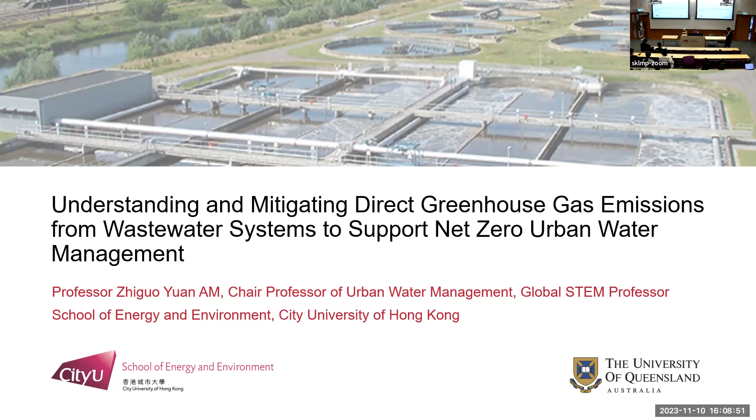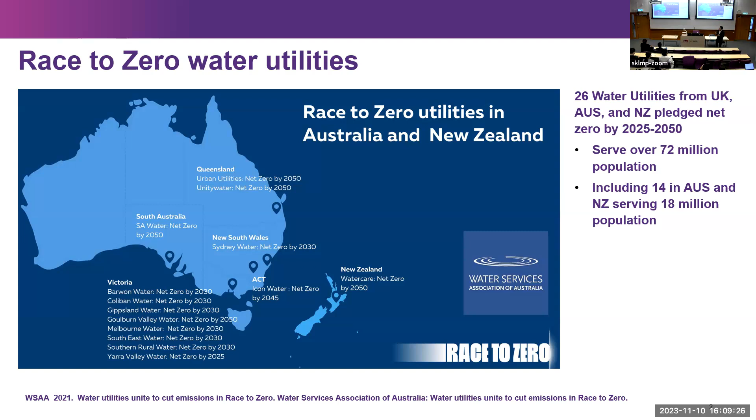At COP26, 26 water utilities from the United Kingdom, Australia, and New Zealand, serving 72 million people, pledged to achieve carbon neutrality by 2025 to 2050, just a short period of time away. I believe more water utilities will follow this strong drive toward carbon neutrality for urban water management.

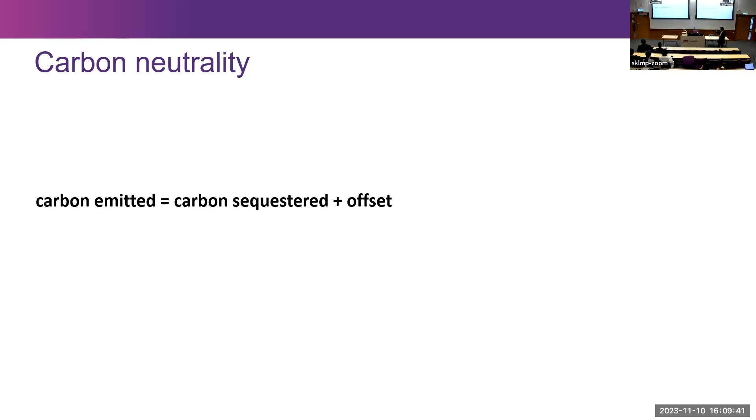So what does that mean? A simple definition of carbon neutrality, or carbon net zero, is that the carbon emitted from your system is equal to the carbon sequestered plus offset. That's the equation. I'll explain each of the terms.

In terms of carbon emission, there are three scopes, three types of emissions. One is direct emission, which I will explain next. Another is indirect emission. Scope 2 is indirect emission due to the consumption of power, since power stations are often supported by fossil fuels, and by consuming power you emit carbon.

Scope 3 is emission due to processes both upstream and downstream of urban water systems. These are the three scopes of emission. But when we talk about carbon neutrality, it includes both scope 1 and scope 2. Scope 3 is not part of carbon neutrality, although some urban utilities aspire to include it as well, which can be pretty massive emissions. So that's the carbon emitted.

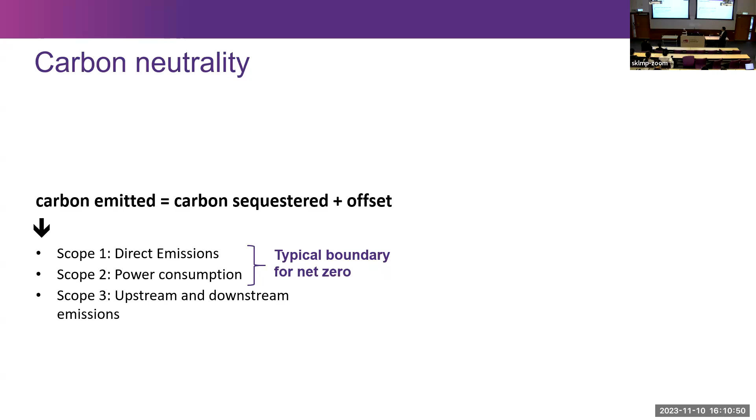In terms of carbon sequestration, biological processes could sequester some CO2 from the atmosphere or other sources. For example, nitrifying bacteria convert CO2 into biomass through CO2 assimilation. That is sequestration, but it's a tiny, negligible amount. However, if you deploy algae-based technology, you could potentially sequester quite a bit of CO2, and that's important.

The third one is some biogas upgrading processes, which is a process we developed. I will share those ideas with you towards the end of my presentation.

Now, offset. This is very flexible. In wastewater treatment, if we recover energy from wastewater and use part of it for urban water management, we reduce scope 2 emission. But if you have excess power that isn't used within your system and is exported to serve other communities, that is an offset. Or if you purchase carbon credits, or plant trees, those will also reduce your overall carbon balance and help you achieve carbon neutrality.

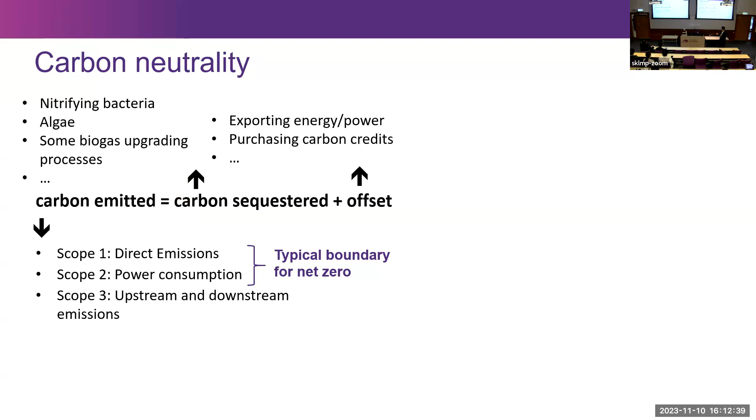Strategies to achieve carbon neutrality include, number one, reducing direct emissions, reducing scope 1 — these are gases you emit from your system. Reducing them helps you achieve net zero.

For scope 2, there are a few things we can do. One is to reduce energy consumption — if you reduce electricity consumption, you reduce indirect CO2 emission. Or you generate renewable energy from wastewater and reuse it, reducing the amount of energy you need to import. Third, you can purchase renewable energy like solar or wind power for wastewater management, which also reduces scope 2 since those sources emit less CO2.

The third strategy is offset. If you produce energy and export it to other communities or clients, you generate credit for yourself. Sequestering CO2 also helps you offset, as does purchasing carbon credits or planting trees. All of these belong to offset — these are the ways to help achieve carbon neutrality.

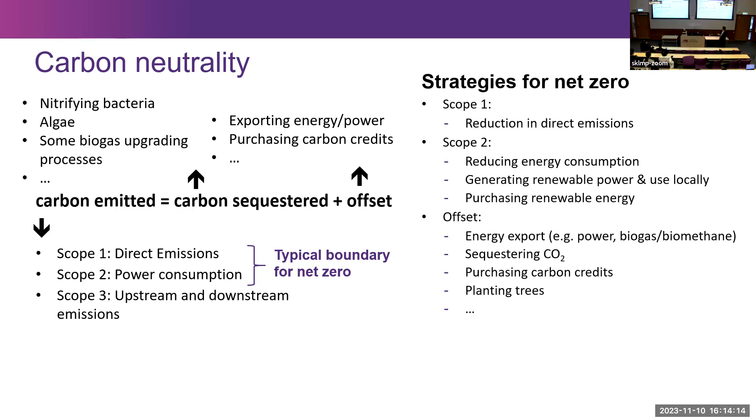With that background, my presentation today is divided into two parts. First, we focus on direct emission — what are they, and how much are we emitting from urban water systems? I'll focus on quantification. Our team has also worked on the fundamentals, understanding, and modeling, and I'll touch on those aspects, though I won't give full details on the modeling.

Then I'll get to part two, which is on mitigation. So part one helps us understand how much we are emitting, but that's not enough — it doesn't really help you to reduce emissions.

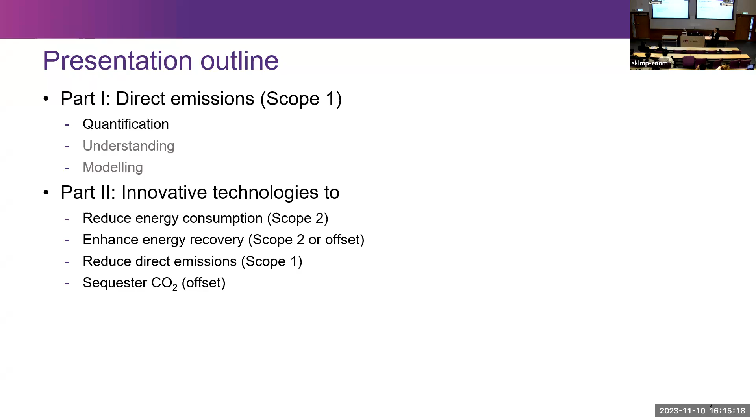So part 2, we focus on innovative technologies to reduce energy consumption, to enhance energy recovery, to reduce direct emissions, and also to help sequester CO2. If we can achieve those goals, we really physically reduce the carbon footprint of an urban water system. So that's the outline of my presentation.

So part 1, direct emissions. What greenhouse gases do we emit from urban water systems? We really talk about 3 gases: nitrous oxide, N2O, methane, and carbon dioxide. The first two, I'm sure you all know already. They are strong greenhouse gases.

Carbon dioxide, I need to make one clarification. In general, wastewater treatment processes emit a lot of CO2 because of the oxidation of organics into CO2. But the majority of that is not regarded as greenhouse gas emissions, because that CO2 is coming from biomass, which is short cycle, the carbon short cycle. CO2 assimilated by plants, we consume the plants, we emit CO2 back to the atmosphere, and plants will take it again. So that's really a short time cycle, and that is not considered as your contribution to greenhouse gas emissions. However, wastewater also has some carbon that is from fossil fuels, for example, detergents you're using, or so many things you're using in your household or in industry. And if that carbon comes to the wastewater treatment plant, you oxidize that to CO2, and that is a direct emission. So I just want to make that clarification.

Now, if you look at carbon CO2 production, that's easy to understand. We oxidize the organic carbon, we produce CO2. And if you look at methane, that's an anaerobic process. Most people here should understand that anaerobic biological conversions convert organic carbon to methane. That is the principle for methane formation.

N2O production, I need to explain a little bit. For those who work on biological reactions in environment or in a wastewater treatment process, you understand that the biological nitrogen cycle is very important. These are the important steps: ammonia oxidizes to nitrite by ammonium oxidizing bacteria via hydroxylamine, and then nitrite can be oxidized to nitrate by nitrite oxidizing bacteria. That's another step. Then denitrification goes from nitrate to nitrite to NO, N2O, and nitrogen gas. So that's nitrification and denitrification, which are fundamental for biological wastewater treatment, because we need to remove nitrogen from wastewater using nitrification and denitrification.

If you look at this, you can see N2O is sitting in the middle of the denitrification pathway, so it is a compulsory intermediate in denitrification. Therefore a lot of N2O is produced by heterotrophic denitrification. Fortunately, that reaction happens in an anoxic tank, where there's no active aeration, meaning no gas is leaving. Therefore, although N2O is produced, it is almost immediately converted to N2, not much emission. So that's a lucky aspect.

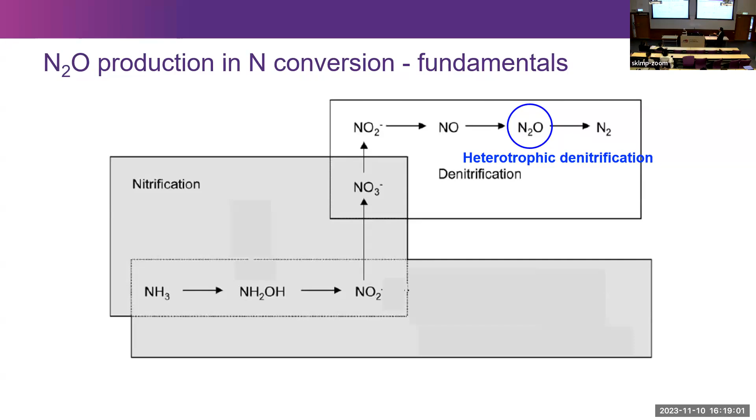But if you look at nitrification, ammonium oxidation, this is done by AOB, ammonium oxidizing bacteria. They produce N2O as well. They do nitrite reduction, not for a known purpose, maybe for detoxification or for whatever reasons. They do nitrite reduction to NO and from NO to N2O. Unfortunately, they don't have the enzyme to continue the denitrification from N2O to nitrogen gas. Therefore that is stopped there. That N2O is produced aerobically, because this reaction happens in the presence of oxygen, and oxygen is provided through aeration. So you have a gas going through to provide oxygen, and that same gas will take nitrogen and N2O out. So whatever is produced there, the majority of that is emitted.

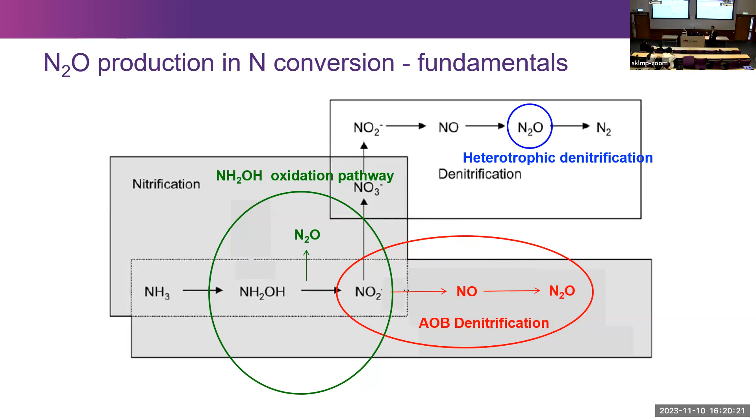So that's one process. Another one, the green pathway, is also produced by AOB, ammonium oxidizing bacteria, and that pathway is called the hydroxylamine oxidation pathway. The red is AOB denitrification, the blue is heterotrophic denitrification, and the green is hydroxylamine oxidation pathway. That is also produced aerobically, therefore it can also be stripped. I just wanted to give you some fundamentals so you understand better what I will be talking about.

Now I have covered what gases are emitted from an urban water system, and also explained how N2O is produced in an urban water system or wastewater system. Next question is: where are these gases emitted? What I'm showing here is a complete urban water system. We start from reservoirs where we store water, the catchment stores the water for water production, and the catchment produces N2O and methane.

After water consumption, the wastewater goes through sewer networks where potentially we have methane and N2O. Then when that wastewater comes to the wastewater treatment plant, where biological reactions happen, N2O, methane, and fossil CO2 will be produced.

And when the effluent, which still has some organics, goes to the receiving water environment, the river or estuaries, N2O and methane can be emitted as well. And going to the bay, even in the bay and marine environment, we also have N2O and methane. So basically they are produced everywhere.

My research team has actually worked on all these elements, but today I can't cover everything. I will mainly focus on this environment, wastewater treatment, sewer networks. The rest I will touch upon briefly.

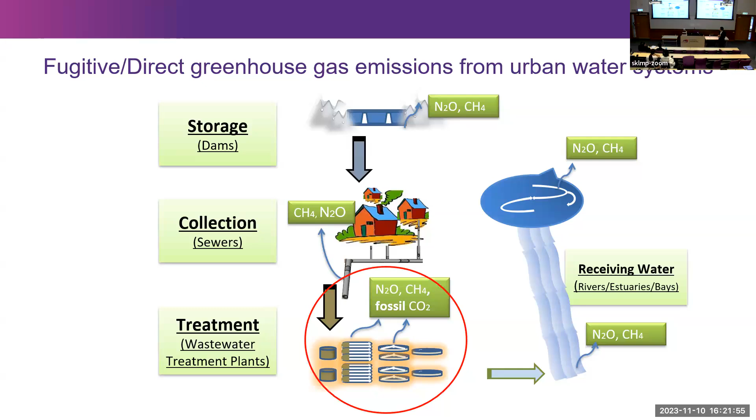Wastewater treatment plant first. I guess the audience here in the room or online may not have a complete picture of how wastewater is treated in a wastewater treatment plant. So I'd like to walk you through the processes involved in wastewater treatment.

Here we have wastewater delivered to the treatment plant where we could potentially, not always, have a primary settling tank where the suspended solids in wastewater is separated and then diverted. I will come back to that point. And then the settled effluent, primary effluent, is fed to a biological reactor or multiple biological reactors where biological reactions happen.

The biological reactions remove organic carbon and remove nitrogen. So here in this tank, that's where biological reactions happen. And then the biological reactions lead to the growth of bacteria.

Here we have sludge, and here we have a secondary clarifier where the biomass is settled and the treated effluent is discharged after disinfection. And then here, the majority of the biomass is returned to the reactor to retain the bacteria in the system to do the work for us, but some excess sludge will join the primary sludge.

And send it to a thickener where we thicken the sludge, and then the thickened sludge is fed to an anaerobic digester. That's the energy recovery process. Anaerobically, we convert organic carbon in the sludge to biogas.

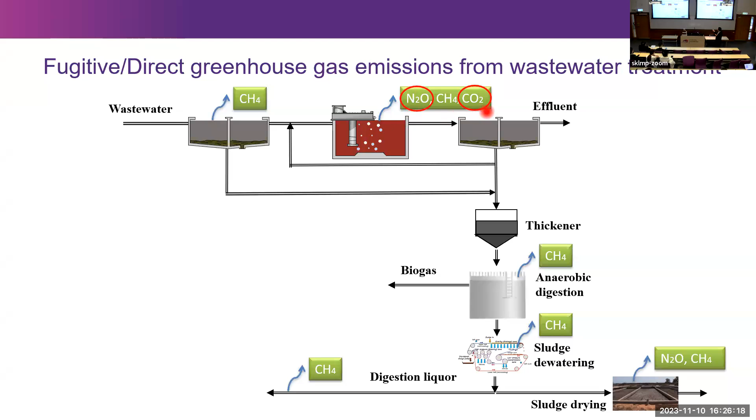And then methane here from the anaerobic digester, that's more a management issue, and I did not work on that. I think that can be improved through proper management. My team also worked on technologies to remove that methane from anaerobic digestion liquor, but I won't be able to cover that. And this, we also worked on this drying lagoon, but I won't have time to cover that either. So I will focus on N2O and CO2 emission from a wastewater treatment process. So that's the treatment process.

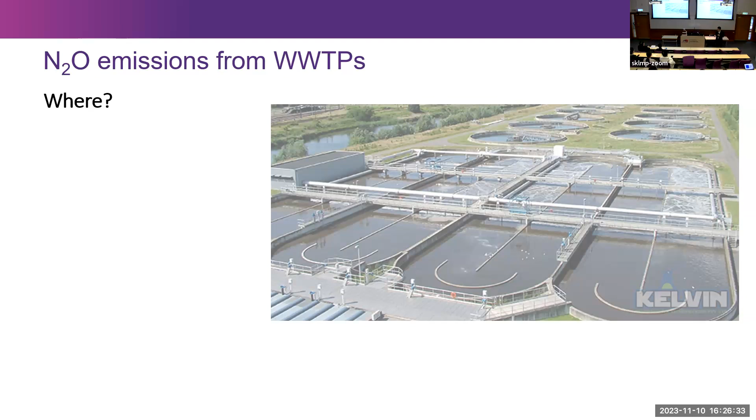Okay, this is a wastewater treatment process, and the first question we want to answer is: N2O is emitted, but where in that treatment process, and in the biological reactor, where is that emitted?

In the biological reactor, we have anoxic zones where we provide no aeration, so no gas is going through the reactor, and aerobic zones where we provide air to give oxygen to the process. So aerobic, anoxic - what I'm trying to show is it's mainly from aerobic zones, less from anoxic zones.

I'd like to bring attention to this slide I showed you before. Although we produce a lot of N2O through denitrification, there's no active stripping, so therefore very little N2O from denitrification is stripped. But for these two N2O sources, green and red, they happen in the aerobic zone where you have aeration gases going through and actively stripping that off. So therefore we have more N2O from the aerobic zones than from anoxic zones. That's the first question answered.

And then, by whom? Who is doing this? I think with my explanation it's clear to you - the main contributor in terms of N2O production is heterotrophic bacteria, they produce most of the N2O, but it's not stripped. In terms of the N2O that is stripped, it's mainly produced by the ammonium oxidizing bacteria through those two pathways, the red and the green pathways. So that question was also answered.

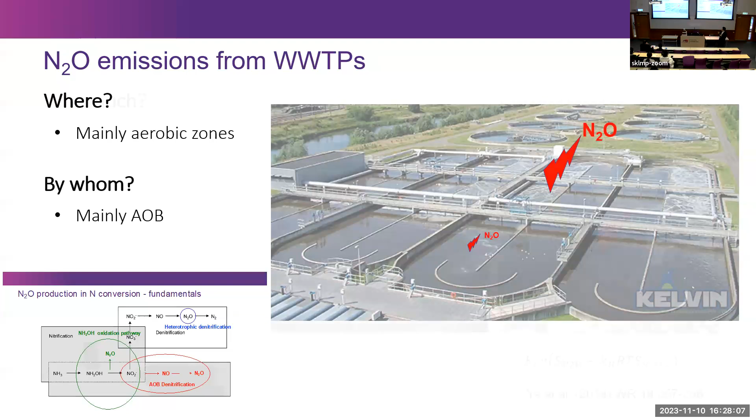I probably won't show you the evidence, but just believe me. And then the next question: how much? How much are we emitting? There are two different methods to quantify this.

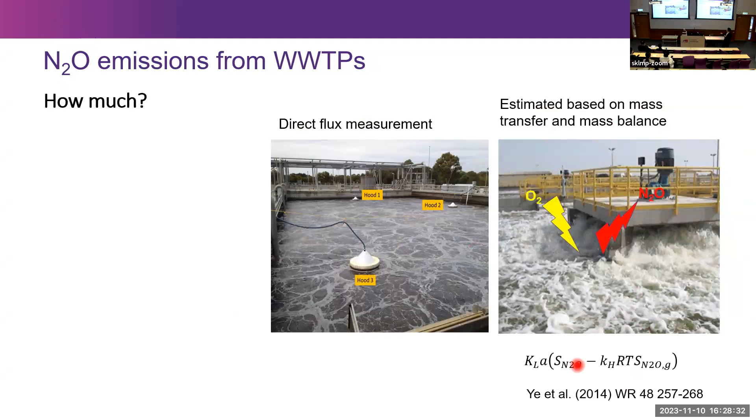One method is to cover part of this aeration tank, the biological reactor. We put some hoods there, we collect the gas, and then we use an online analyzer to analyze it. And then we could also use some mathematics to estimate it. So we don't need to go into details.

Now, some 15 years ago, my team started measuring quite a few wastewater treatment plants in Australia. I'd like to show you the results. But before I show you the results, I'd like to make one definition: the emission factor.

There are many different definitions of emission factors in literature. The one I'm using is: emission factor is the percentage of nitrogen in the wastewater influent converted to N2O. If you have 100 kilograms of nitrogen coming to your treatment plant, and you have 1 kilogram of N2O formed, then the emission factor is 1%, right? So that should be simple.

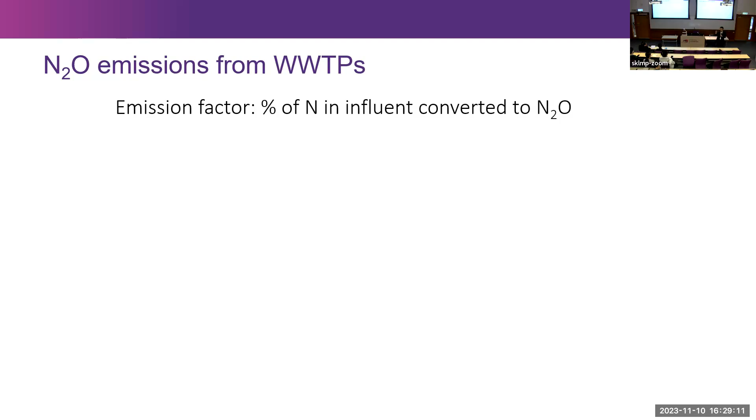But then how high is high? There's a rule of thumb here: an emission factor of 0.5% or above - if 0.5% of your nitrogen in wastewater is emitted as N2O, the greenhouse gas effect of that emission is equivalent to, roughly speaking, 20% of your overall carbon footprint, or adds 20% to your carbon footprint. So that's very significant - 0.5% adds substantially to your emissions.

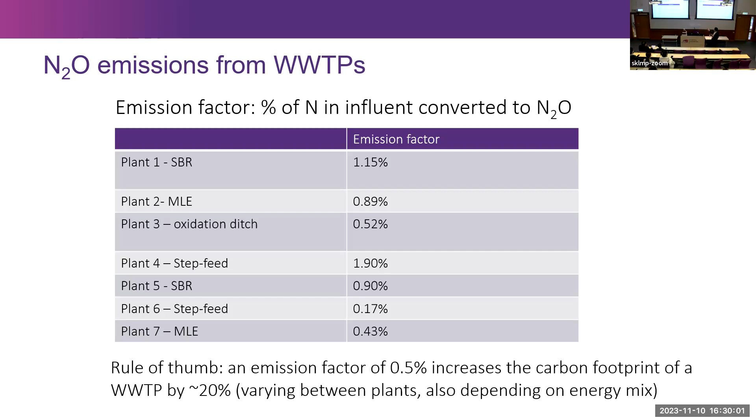Now, ready to show you some of the results. In that round of measurement campaign - that was the second round of our measurement campaign; literally right now the team at UQ is doing the third round - you can see the 7 plants there, and these are the emission factors we determined. The lowest we found was 0.17, which is really good, very low, but the highest we found was 1.9 - so a wide range. The median level is about 1%.

Remember, I said 0.5% would add 20% to your carbon footprint - 1% will add 40%. So that is not negligible, it's a fair bit. So that's our results.

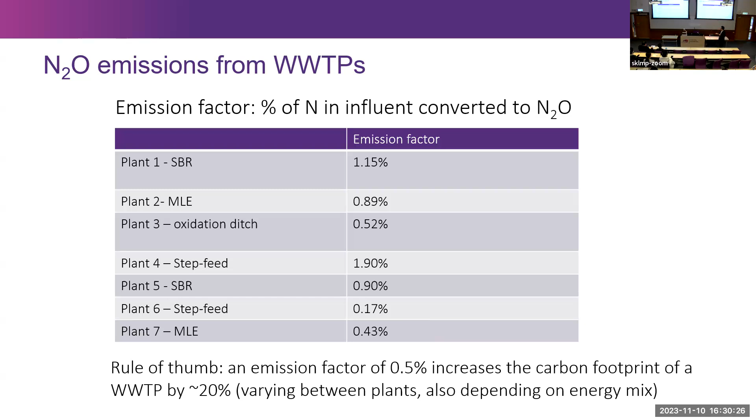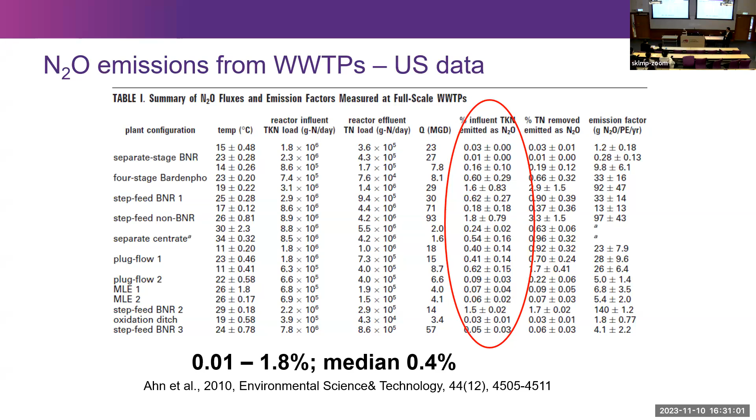I have reasons to believe that may be a little bit underestimated, because at that early stage of measurement the methodology was still being developed. So that 0.4% may be an underestimate.

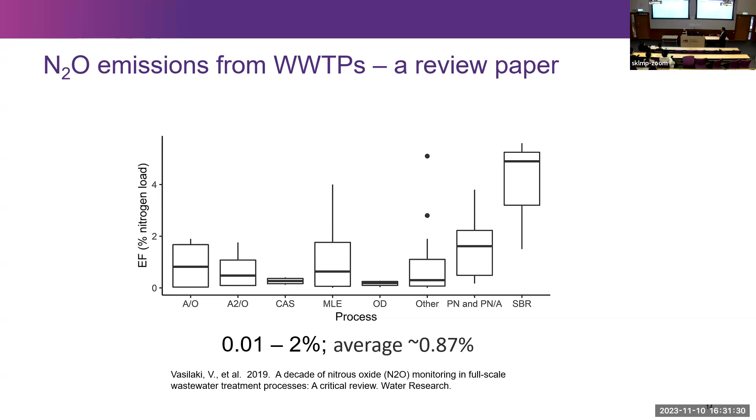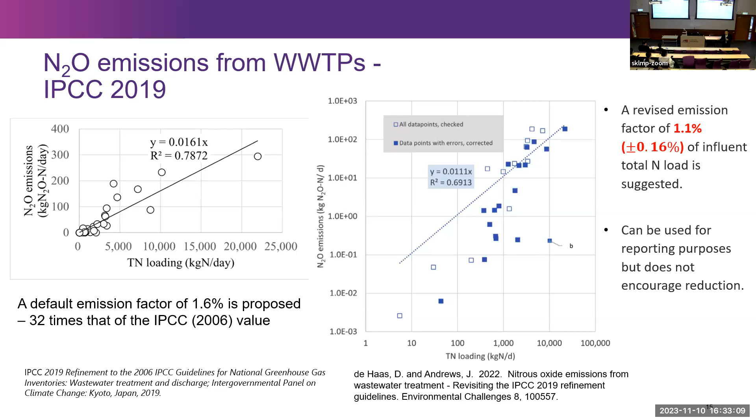Once we know the emission factor, that gives us an idea how much we are emitting, but it doesn't really help us reduce emissions. If we use 1% for accounting while making no effort to reduce it, that doesn't help reduce carbon emissions. Therefore I believe that's not adequate. We should really further improve that emission factor estimation based on performance.

Now that's the N2O. I'd like to give one slide on CO2 emissions from a treatment plant, not because the emission is significant, but because the method is quite interesting. Some of you may use this method in your own studies. What we did was make use of the fact that the plant biomass has different C13, C14 levels.

The C13, C14 levels in plant biomass are different from C13, C14 levels from fossil carbon. So if you have different C13, C14 signatures in the normal renewable carbon versus the fossil carbon, we can use that to separate them using some of the machines our key laboratory has, and determine how much fossil carbon we have at different stages of the treatment. For those interested in this technique, you can check our paper — a 2013 publication. The conclusion is 1 to 7% of the greenhouse gas emissions from a wastewater treatment plant can come from fossil CO2.

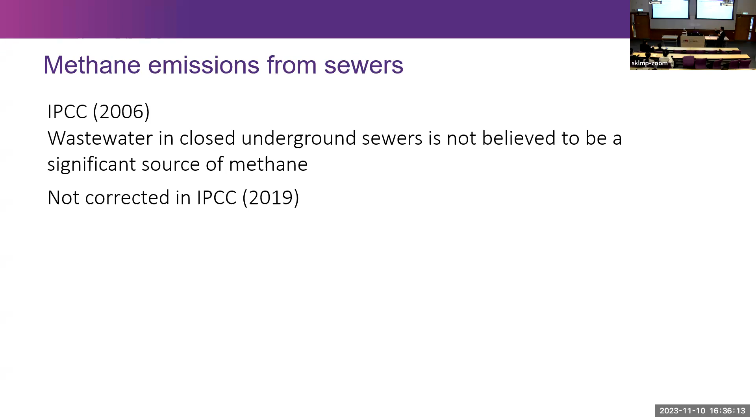That's the general conclusion. Now coming to methane, another source: methane emissions from sewer networks. In the IPCC 2006 guidelines, they said no emissions. Then in 2008, we published our paper — the first paper to show they were wrong, and that there are significant methane emissions from sewer networks, based on our research. Unfortunately, they did not really correct that issue even in the 2019 guidelines, but they did recognize it as something to be considered in the future.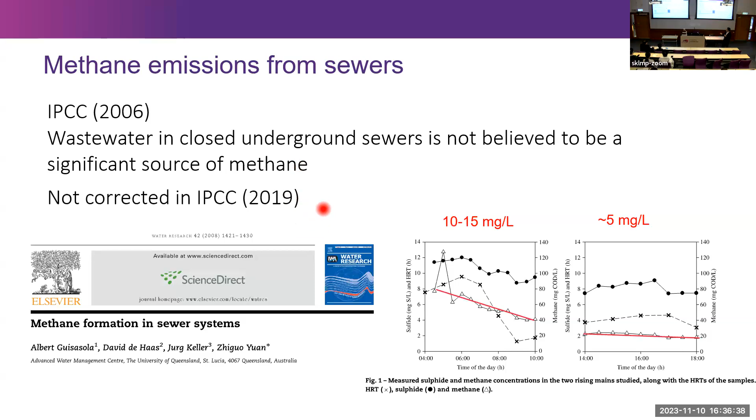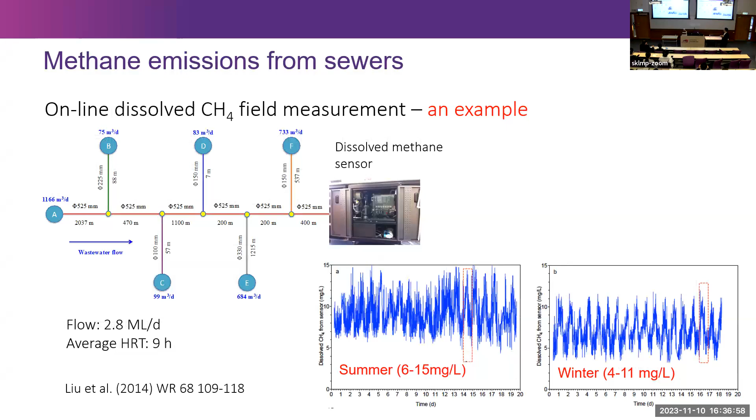So our team continued to work on methane emissions from sewer networks. I'll skip the details in the interest of time — the basic conclusion is there are significant emissions that most of the time cannot be neglected. How significant can it be? Based on the amount we measured, we estimated the typical CO2 equivalent per megaliter of wastewater compared with the normal emissions from a treatment plant, and came to the conclusion it's somewhere between 3 to 40%, meaning from negligible in some cases to very significant — 40% you can't ignore anymore.

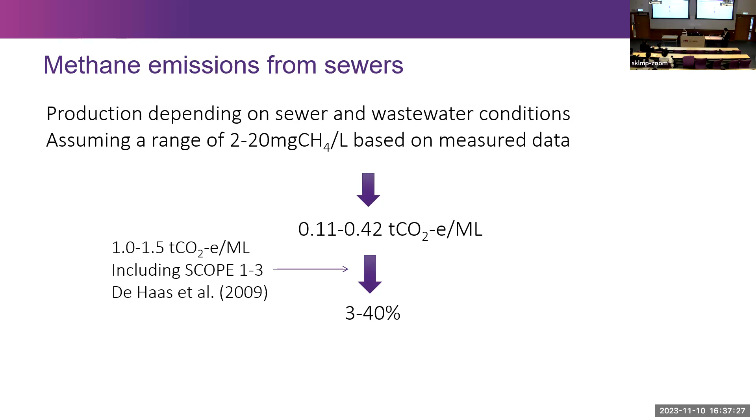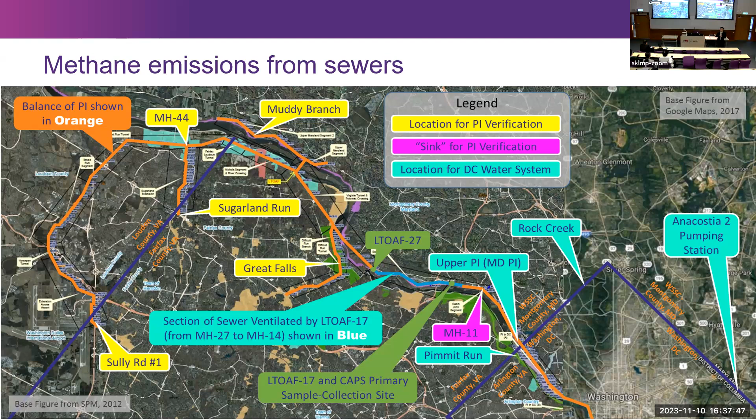But the issue — this figure shows a sewer network — is that methane emission from sewer networks is extremely hard to quantify, unlike a wastewater treatment plant which you can measure. A sewer network spreads across the city with a lot of openings, manholes, and pumping stations, so you can't really easily measure those. So we came up with a model-based estimation approach, but in the end I'll show you the key results — we have come up with accounting guidelines.

We are hoping that IPCC can adopt this eventually.

For gravity sewers that are driven by gravity, this is the equation we propose. Very simple: Q is the flow rate, D is the diameter of the pipe, S is the slope of the pipe. Once we know those and we know temperature, we can estimate methane emissions.

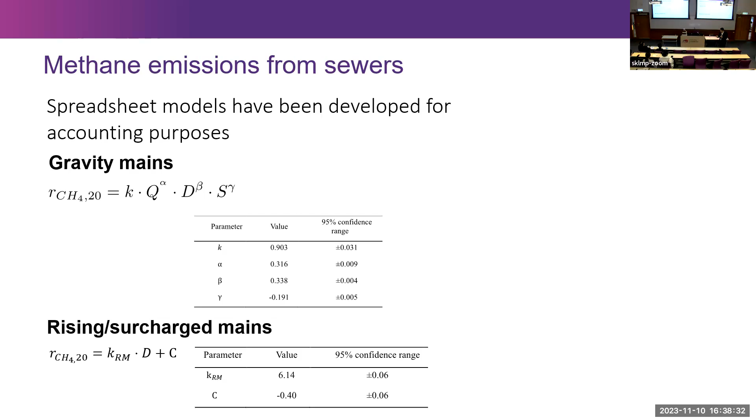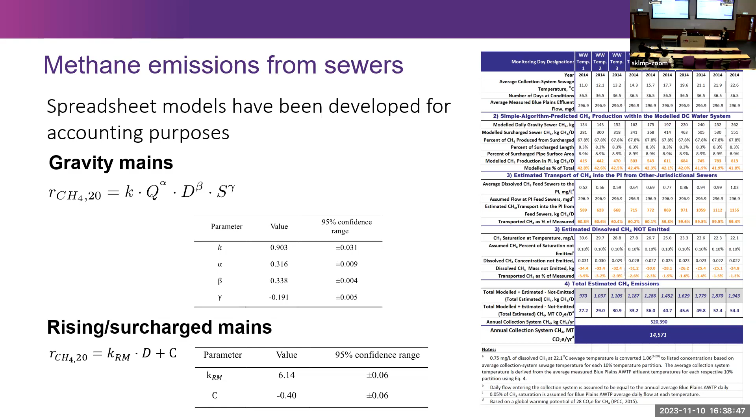For rising mains or pressurized mains, we get different equations. We're hoping this research work is going to influence the policy, influence how the IPCC is going to recommend in the future. This is an example showing how we use the equations to estimate methane emissions from a sewer network in Washington, DC, in collaboration with some colleagues in the US.

Now, two slides on the methane and N2O emissions from waterways—the bays, the rivers, estuaries. I thought this may be of interest to you. Unfortunately, I don't have strong conclusions. We did work on those areas for quite some time.

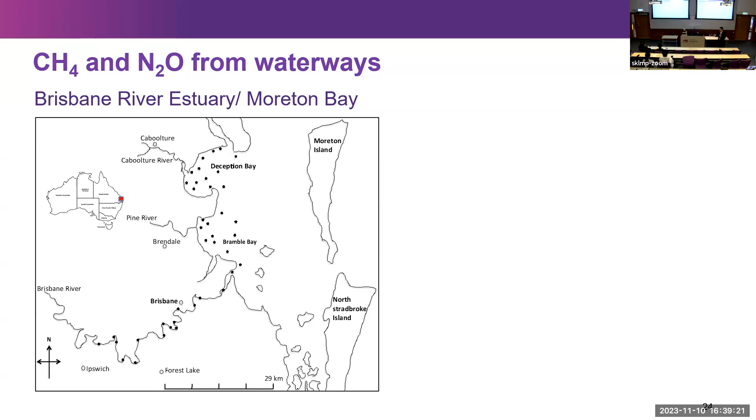That's a bay, Brisbane in Australia, a big bay there. We had our sampling locations along the river—this is the river, this is the bay. You can see a lot of work there. We also did reservoirs, water storage dams supplying drinking water in Australia. We produced a lot of results for each of those systems we measured.

Unfortunately the conclusions are not extremely strong because it's very difficult to draw general conclusions. Here are the conclusions: large variations between systems—each system is different, with different levels of emissions, and large spatial and temporal variability. It varies between locations in the same system, and between different times of the year and different times of the day. We observed all that variability.

Another relevant finding: methane dominates in reservoirs upstream, while N2O emissions are more dominant in the bays, estuaries, and rivers. In Australia at least, it's very hard to separate the contributions of urban wastewater to those emissions, because wastewater treatment is quite advanced there—we couldn't really separate the contributions of the urban water system to methane and N2O emissions from the receiving water environment.

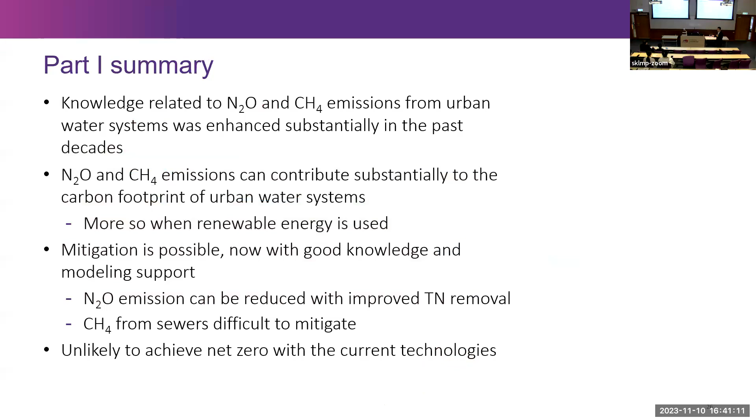So, part one summary—I think I used too much time already. Over the years we have generated a lot of understanding of methane and N2O emissions, and we show mitigation is possible. But I'd like to draw your attention to the last conclusion: it's unlikely to achieve net zero with current technologies. That's an important conclusion, and I'd like to explain what I mean by that.

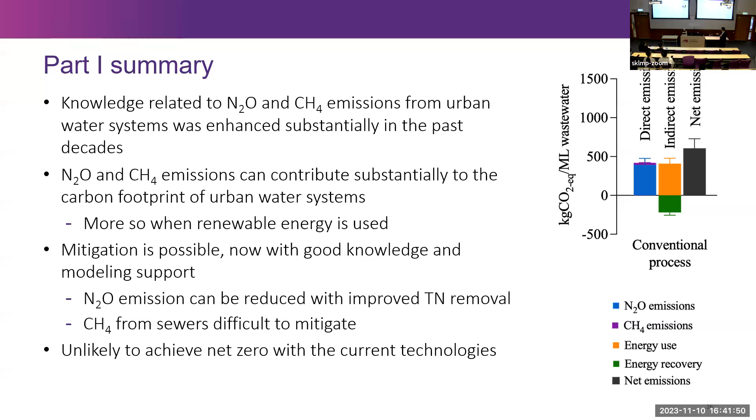So then we need innovative technologies to reduce the carbon footprint. We have multiple goals we want to achieve, but the key issue is, are these goals consistent? When you achieve one goal, are you actually deteriorating another performance? The good news is they're actually reasonably consistent—that's what I'd like to show you.

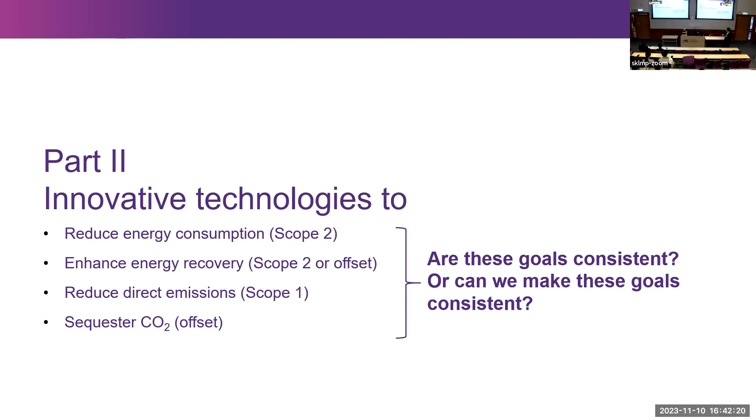I said we could potentially have conflicting goals—if you want to reduce energy consumption, you could potentially increase N2O, or vice versa. Fortunately, this is not the case. The goal of reducing energy consumption is consistent or compatible with the goal of reducing N2O emissions. With some luck, I think that's beautiful—really nice. In this particular case, we managed to reduce both direct emissions and energy consumption, which is really good.

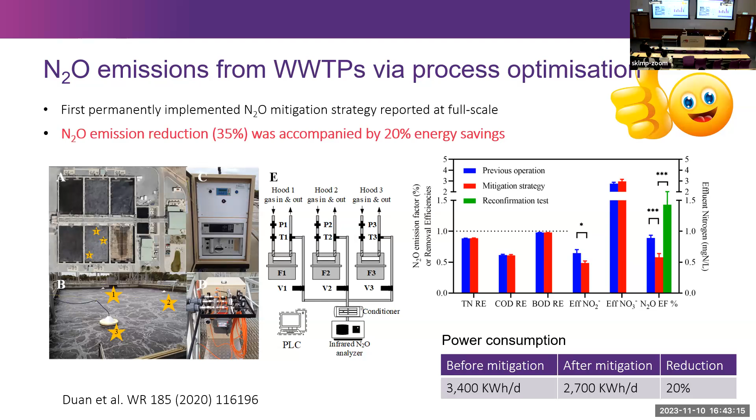Now, as I said, with the current technology it's going to be very difficult to achieve net zero. The reason is that anaerobic digestion for energy recovery is an add-on feature to the treatment process. Historically, we treated wastewater using this technology, and afterwards we gave it an afterthought—oh, we should also recover some energy, so we added this digester.

And the amount of energy we can recover here is relatively small. And therefore, in order to achieve net zero, we actually need to do something fundamental to the design of a wastewater treatment process.

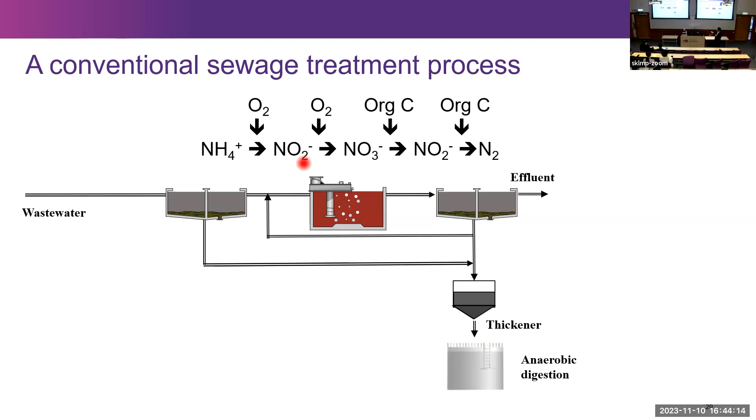I'd like to highlight the importance of organic carbon for nitrogen removal. So, nitrogen removal: ammonia to nitrite, nitrite to nitrate, and then denitrification, nitrate back to nitrite and to nitrogen gas. For denitrification, we need organic carbon. In order to have that carbon, we actually need to give most of the organic carbon through this process rather than to the anaerobic digester. So that's a fundamental difficulty in achieving a high level of energy recovery.

In fact, in most treatment plants in Australia, we don't have a primary settling tank anymore, in order to completely remove that separation. So all the carbon is fed to the biological reactor to support denitrification. With that, we actually increase the energy consumption here. So the goals do not really add up.

But now, commonly in the wastewater treatment area, the accepted configuration for the next generation is that we need to enhance upfront carbon separation, for example by using the HRAS process. We include HRAS, separate as much carbon as possible from the wastewater, and divert it to the anaerobic digester for bioenergy recovery. Then the carbon-deficient wastewater is fed to the biological treatment unit to remove nitrogen.

The problem is, when we don't have much carbon there anymore, we can't use conventional nitrification-denitrification, because denitrification requires carbon. So we do achieve the goal of energy recovery, much enhanced energy recovery, but we need to deal with nitrogen removal. So here we use the partial nitritation-anammox process.

For those who have heard of it: we oxidize 50% of the ammonia in the wastewater to nitrite, then use the nitrite formed to oxidize the remaining 50% of ammonia, producing nitrogen gas. So we remove nitrogen without carbon, and by doing so we allow the carbon to be diverted to the digester for bioenergy recovery. All beautiful, and by doing that we also reduce energy consumption here.

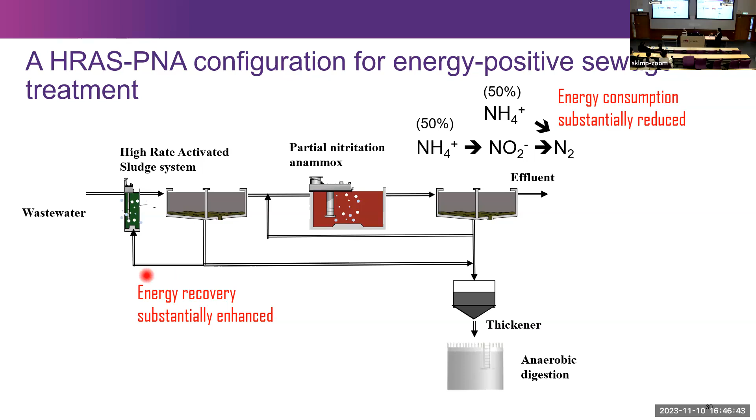So we reduce energy consumption by 50 to 60%. If you look at this, we recover more energy using carbon separation, and we consume less energy. So these two goals can be achieved simultaneously, which is beautiful.

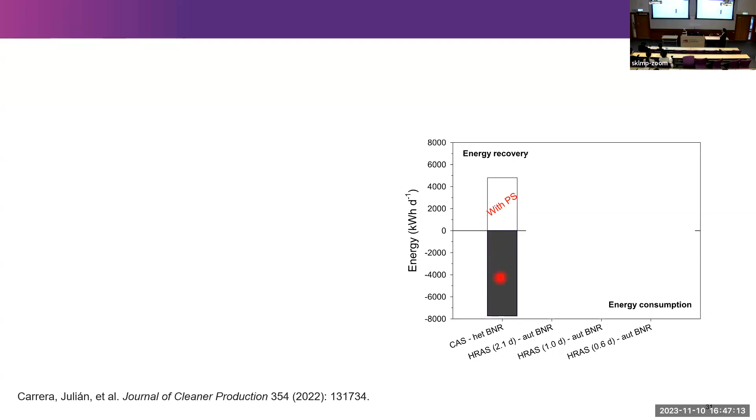I'll show you some results from the literature. This is the process, the system without separation. You can see we have a primary settling tank. This is the energy consumption, this is the energy recovery. This plant actually got very good energy recovery, but that's only 50% of the energy consumption. That's what's achieved with the primary settling tank.

But now, if we look at using HRAS for carbon separation, you can see we can remove 60 to 80% of the COD, the organic carbon in wastewater, for energy recovery. That's really good, and you can recover a fair bit of bioenergy from wastewater.

With that, without needing to worry about the details, you can see in terms of energy recovery we have more energy recovered in these three cases, and energy consumption is reduced a lot. If you compare the white bar with the black bar, the white bar is now taller than the black bar, meaning the system is now energy positive. You can produce more energy than you consume, which is beautiful.

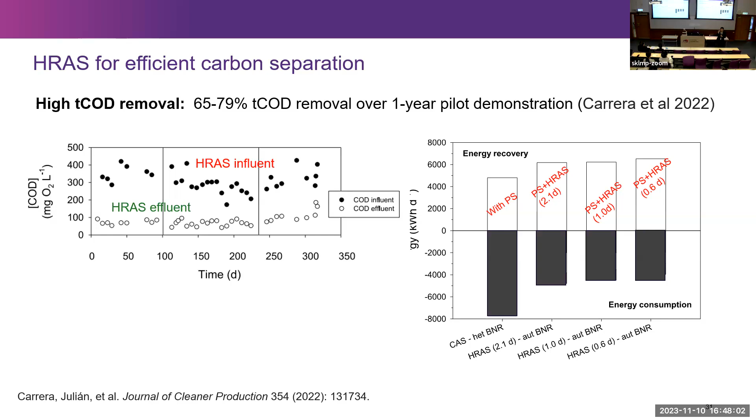Now, the problem: these two goals are achieved - energy recovery and energy consumption reduction, both achieved simultaneously. The problem is there's really an incompatibility here.

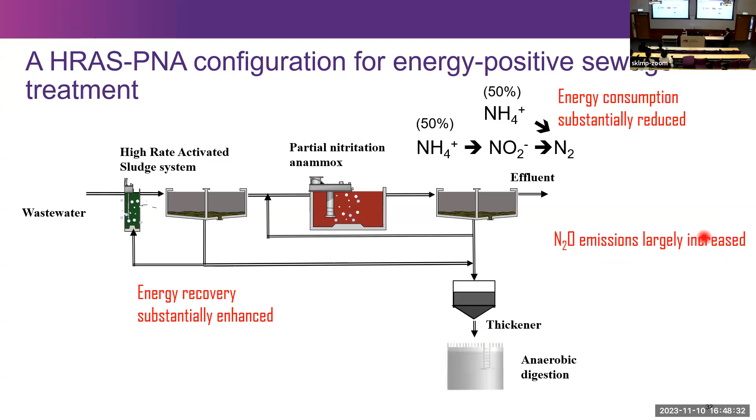N2O emissions largely increase. So with the partial nitritation-anammox process to remove nitrogen, experimental studies showed it produces a lot of N2O, 3.7%. Remember, 1% is about the norm for current technology. This is 3.7%, and this case study is not unique. If you look into the literature, the average emission factor is about 4%, ranging from 1% to 4%.

So we can look at what this means. You've seen this before - this is the black bar, we want to bring it back to zero. So we want to change the energy recovery and energy consumption balance. Now we have green energy recovery larger than yellow, meaning energy positive. But the problem now is the emission factor, the blue bar, goes up 4 times higher. And the black bar, compared to the current technology, has actually increased. We're not achieving our goal - we're traveling against our will to reduce the carbon footprint.

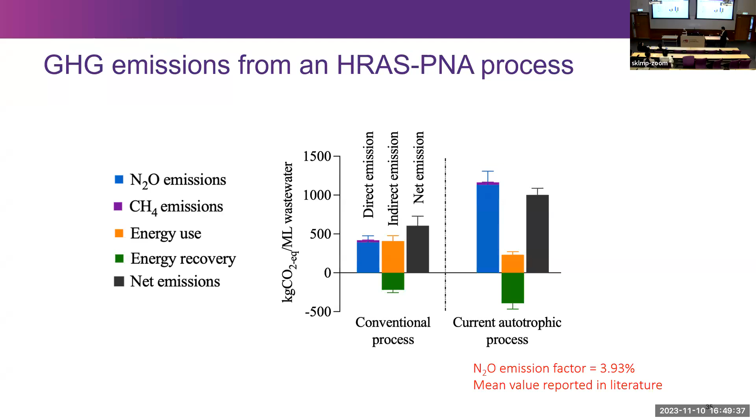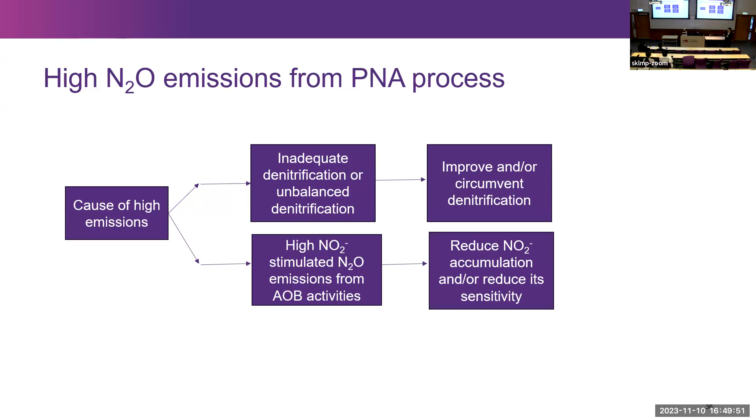So we needed to bring the blue bar down. That's what my team focused on in the last 5 years, to bring that down. We performed an analysis and generated a hypothesis of what the reasons for the high N2O emission factors were. Based on the hypothesis, we designed this process. So this is what we came up with.

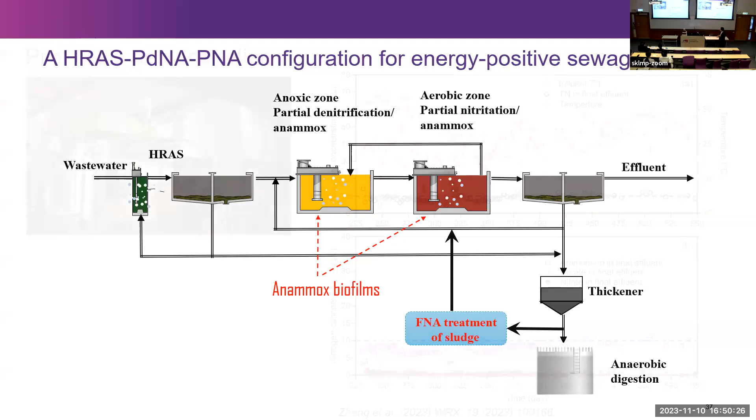In terms of performance, we did 5 years of design, the pilot plant, construction, struggling, and this is the final year we got there.

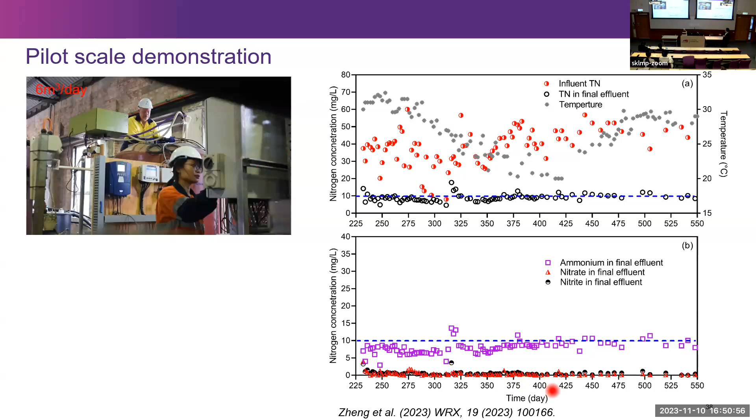Nitrogen removal: the red here is influent nitrogen, which varies a lot because that's real wastewater at a treatment plant. Effluent is below 10, which is the target. Effluent composition shows mostly ammonia, and the rest is almost zero. A summary of the effluent quality is very good, meaning our system was able to achieve nitrogen removal. That was important, but very, very importantly, look at the N2O.

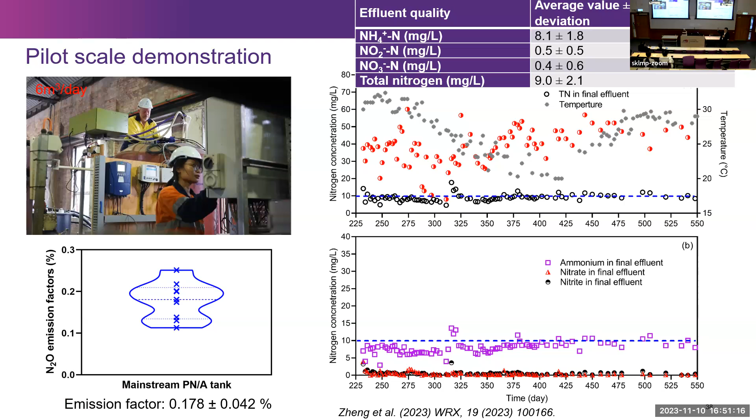The N2O emission factor went from 4% down to 0.18%. And that was really beautiful, some of the details.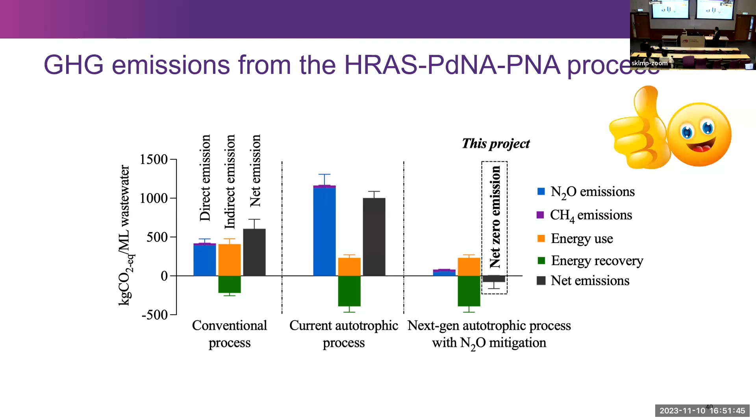Okay, final, I'm coming to the end of my presentation. I don't want to use too much time. This is the final example I'd like to show you: CO2 sequestration.

I've shown you this diagram before. We said we have a lot of direct emissions, and we want to reduce those direct emissions, which we did. We also want to reduce energy consumption for this.

This example is different. We wanted to sequester CO2. The stream we target is the biogas. Biogas is roughly 60% methane, 40% CO2, a significant amount. Normally that CO2 isn't a problem because the majority comes from biomass, renewable carbon, so it doesn't really matter. Nevertheless, if you can sequester it, you get a credit because carbon is carbon. If you can lock it up, you reduce your carbon footprint. So we developed a technology to lock up that carbon.

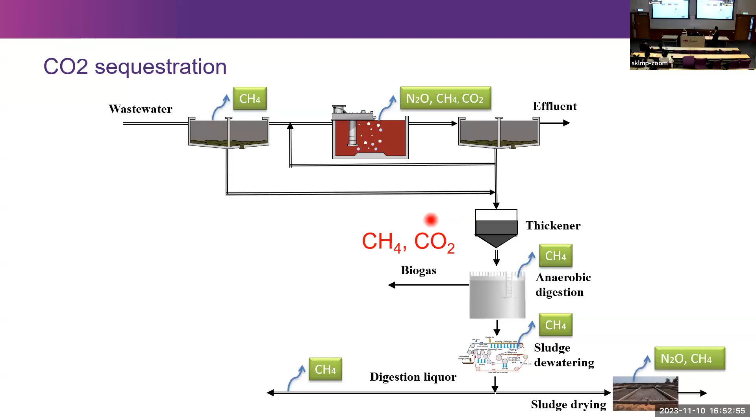I'll show you how that worked. We used an electrochemical process, and the work was just published in Nature Communications earlier this year, just a few weeks ago.

In the electrochemical cell, we use iron plates as the electrode. We apply a little voltage there, oxidizing Fe to Fe2+, ferrous. At the cathode, we split the water into hydrogen and hydroxide. This simple electrochemical reaction is well known, not our invention.

What we proposed was this: biogas produced in a wastewater treatment plant containing methane, CO2, and a few trace gases is passed through the cell. Because we produce hydroxide, this solution is alkaline, and when CO2 goes in, it is locked up there. Then the CO2 binds with the Fe2+. This is the reaction: CO2 locked in, producing ferrous carbonate. I'll show you the overall reaction.

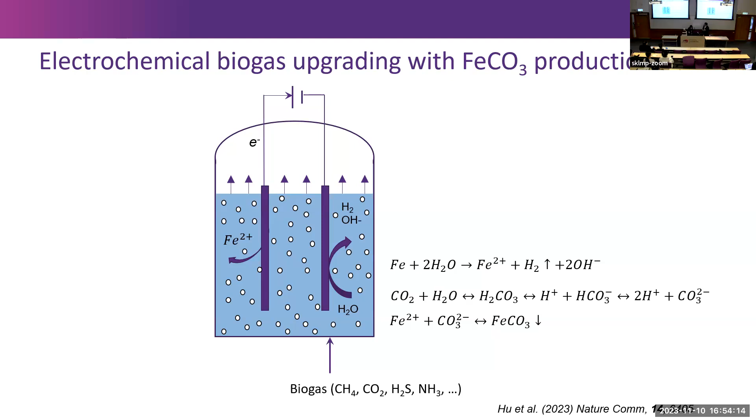Frozen. Oh, it works. Oh, I'm not. It's okay. Yeah, and I hope this works.

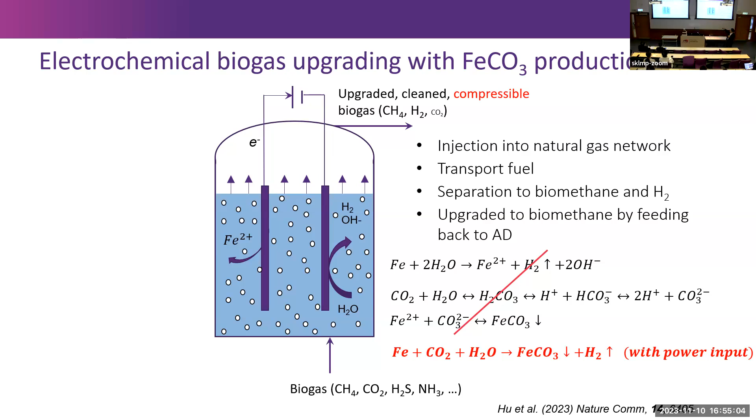The red shows the overall reaction. Basically, in the whole process, we use iron, which can be recycled from car engines, and lock up CO2, forming iron carbonate plus some hydrogen. What we achieve is shown in the off-gas: the biogas gets upgraded, the CO2 is removed, and we mainly have methane and hydrogen, which is a good gas source. You can compress that gas, use it as car fuel, and a few other things. You can inject it into the gas network for home cooking, so the value of the biogas is elevated by that process. That's good.

And at the bottom, we form ferrous carbonate slurry, and the carbon is locked in FeCO3, and that's not leaving the system anymore.

So it's permanently removed from the gas phase and gets into the liquid, and possibly into the solid phase at some point. But if we just stop there, the innovation was not strong. What we've done is actually use that Fe carbonate for urban wastewater management.

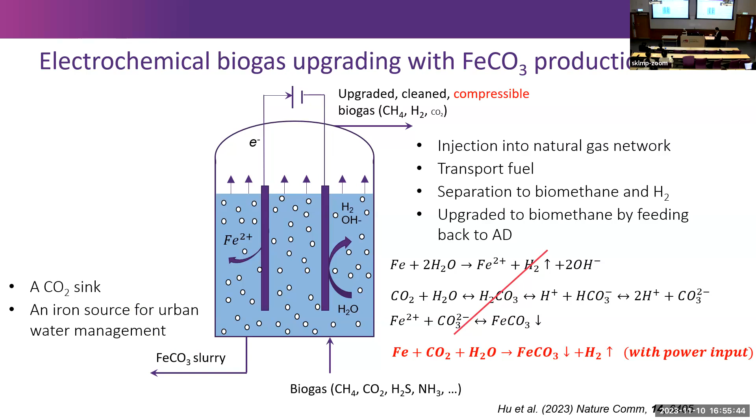So coming to this, I'd like to show you this: the urban wastewater system, sewer network and wastewater treatment plant. In urban wastewater management, Fe, ferric chloride, is often used in the wastewater process, added at multiple points. For example, in the sewer networks at the beginning, the Fe would react with the sulfide forming

FeS. You deal with the odor issue, sulfide cannot go out anymore. This is happening in Australia, very common, and here DSD is using that as well.

So that's a very important technology for sewer odor and corrosion management. It can also be added to the wastewater treatment process where we remove phosphate, forming FeP minerals, and then you remove P, phosphorus, which is also a nutrient you want to remove.

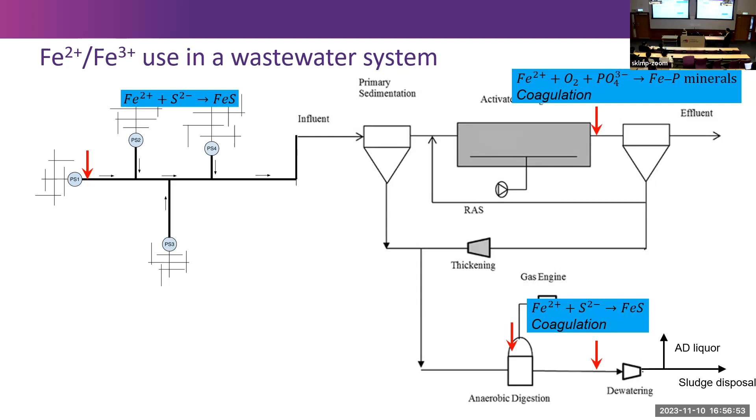It can also be added to the digester. If you add it to the digester, you control sulfide in biogas. So there are already a lot of applications, multiple points in the urban wastewater system where you add iron salts in the form of ferrous or ferric chloride.

Additional benefits include the settability of the sludge, which is very important and means a lot of dollars, and enhancing the dewaterability of the sludge, also a lot of dollars involved there as benefit. One issue with the current technology of ferrous or ferric chloride is that it lowers the pH, lowers alkalinity, which is not desirable. That's the current situation.

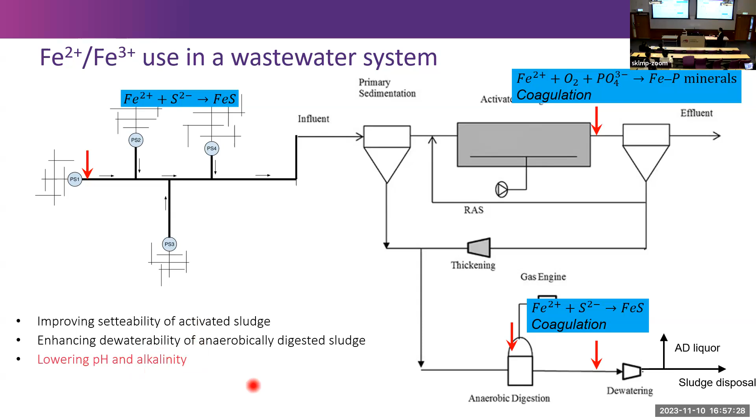Now we are able to produce ferrous carbonate using biogas, and this is the situation: we use our electrochemical cell and we produce ferrous carbonate. So we've upgraded the biogas, which is nice, and we lock away CO2 as a sink, which is also nice. Now we propose to use the ferrous carbonate to replace whatever is used now for urban wastewater management.

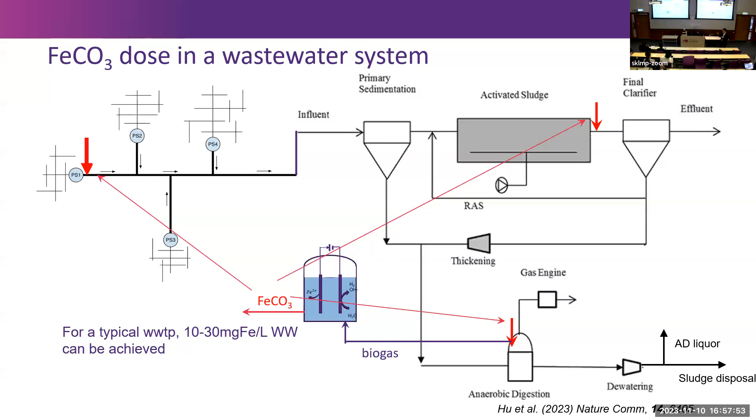We did all the tests, so no need to go into details. We demonstrated the Fe carbonate which we produce, versus what you can buy in the market - that does not work. Only our freshly produced Fe carbonate can readily replace ferric chloride or ferrous chloride for sulfide removal in sewer networks, P removal in treatment plants, and hydrogen sulfide removal from biogas.

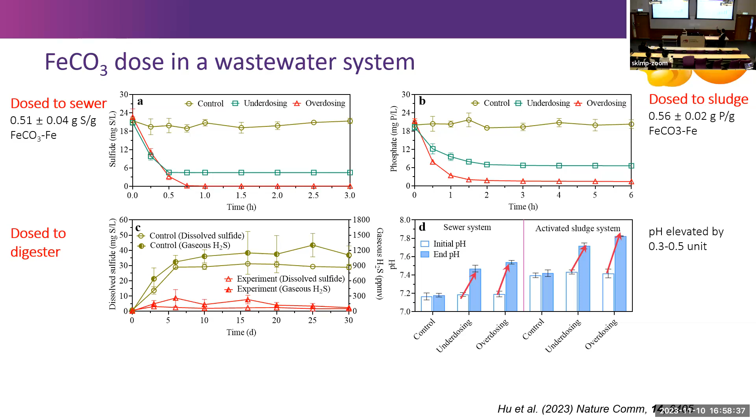Very importantly, we addressed one issue with the current technology: we actually elevate the pH. Elevating pH is always a good thing in wastewater management. So here's another good example.

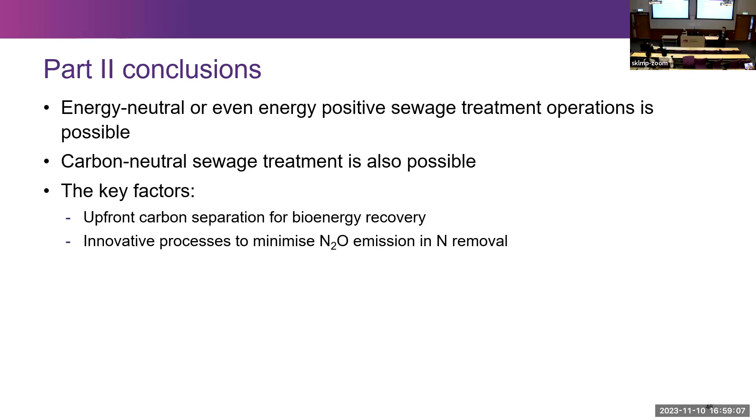Now I'm coming to the conclusions. I think energy neutral, or even energy positive, sewage treatment operations are possible. Carbon neutral sewage treatment is also possible. The key factor is we need to recover as much energy as possible using carbon separation, and we need to deploy innovative technologies for nitrogen removal.